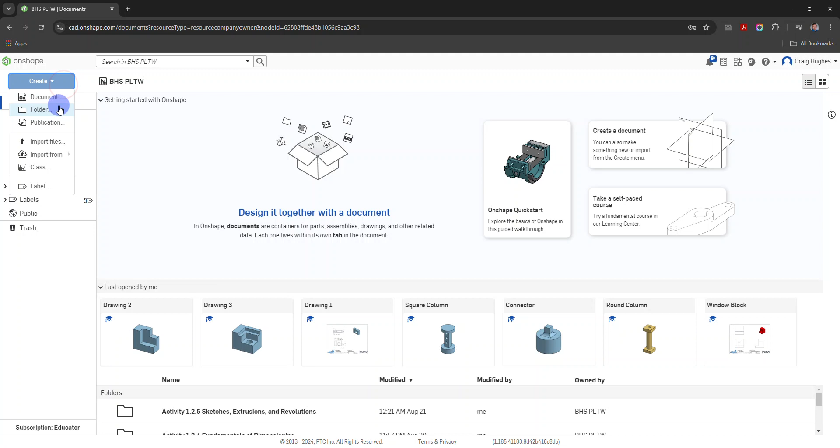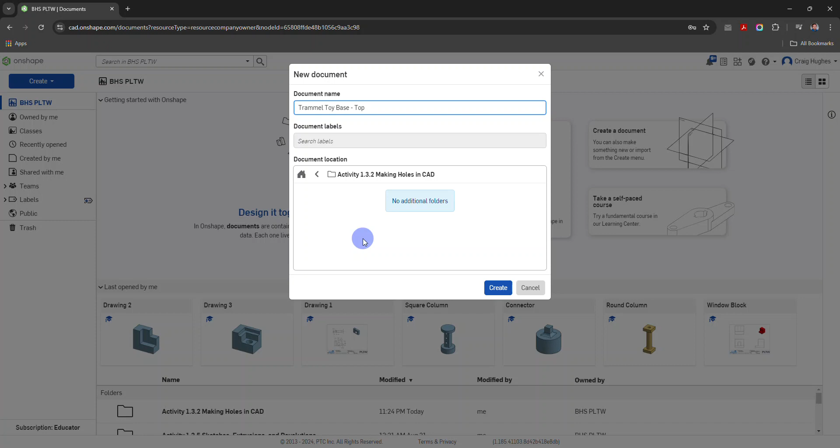To get started, we're going to go to the create button and create a new folder for the activity. With the folder created, we're going to create a new Onshape document, select open, select the folder name, select open, and then select create, giving the document name Trammel toy base, and we'll call this the top. Select create.

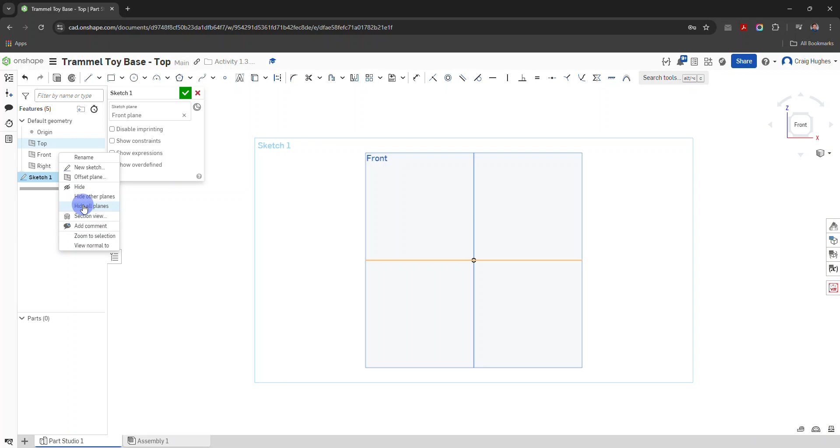We'll go ahead and get started by selecting sketch and then selecting the front work plane, and press the N key to turn us normal to that front plane. I'm going to right click on the top in the browser and select hide all planes to give us a more clutter-free sketch environment.

I'm going to go to the drop down arrow next to the corner rectangle and select center point rectangle, selecting the origin, and build out our rectangle. Our measurements are going to be 4.25 by 4.25 for the sketch.

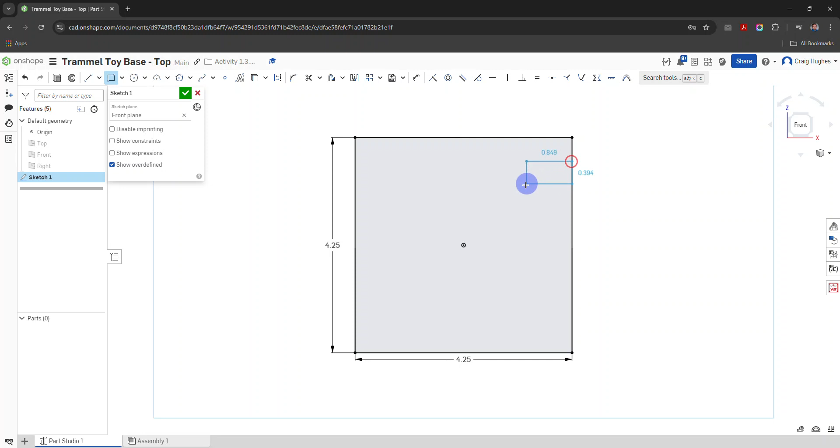While we're in here, we're going to go ahead and create those little rectangular cutouts. I'm going to change from the center rectangle to the corner rectangle. Off the right edge, I'm going to build this rectangle. It's going to be 1.75 by 0.5.

While we're here, I'm going to grab the dimension tool. Click the top edge, click this edge of the top portion of that rectangle. This is going to be a 0.5 measurement. And while we're here, we're going to clean up the sketch using the trim tool, the pair of scissors, selecting it, and then selecting the line, and once more 2 lines to create this open gap.

Now you're going to notice we're going to lose that dimension that we had placed originally. So all I've got to do is click dimension once more, click on the right edge, click on the blue line, 1.75 — it's still there. I can go ahead and hit enter, and that gives us that cutout.

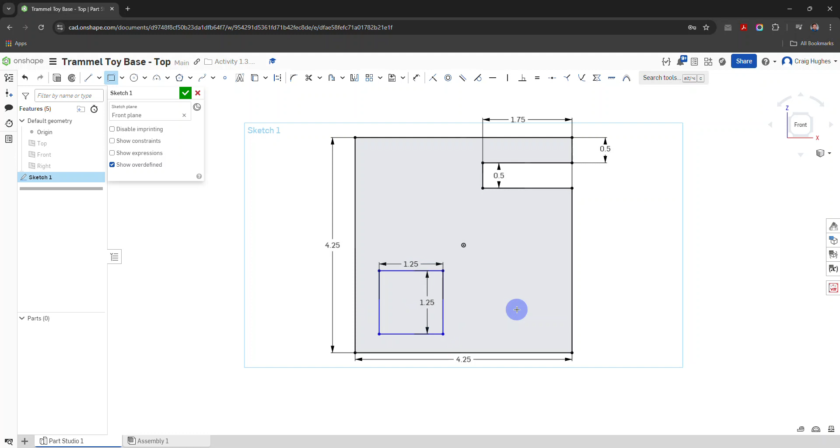Our next one, we're going to grab that 2-point corner rectangle. Down in this area, we're going to create this to be 1.25 by 1.25. Now, in order to fully define this, I'm going to select the left edge of this sketch for the rectangle. Notice I'm still drawing a rectangle, so if that happens, I can always hit escape.

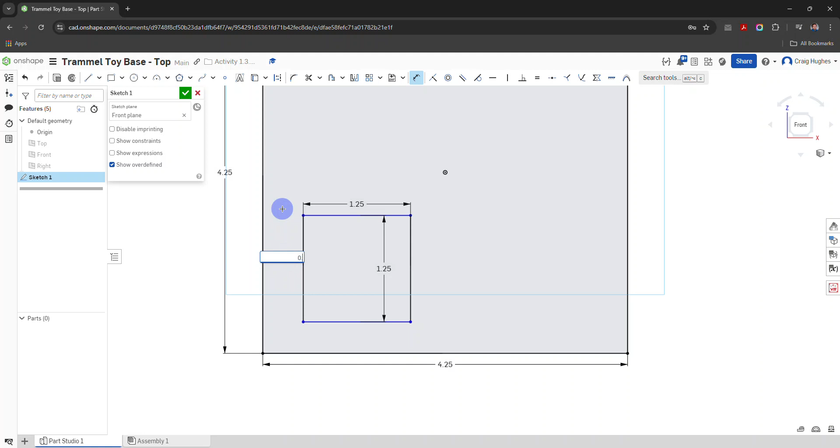Then I can go up and grab my dimension tool, or press the D key on the keyboard. I'm going to select the left edge of the outside rectangle to this one. It's going to be a 0.406. And from the bottom to the edge of this rectangle, same kind of thing, a 0.406 for that measurement.

We've got a fully constrained sketch now. We can go ahead and click the green check mark to finish it. I'm going to right click here in the graphics window and select isometric.

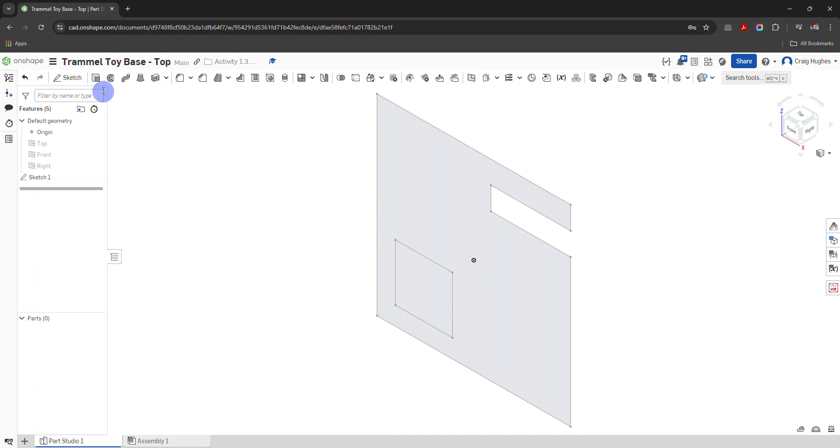We're going to select extrude, select our sketch profile. I'm going to flip the direction. This is going to have a thickness of 0.25. And we're going to select the green check mark. So there's the Trammel toy top base for the most part.

The next piece of this is going to be adding in the holes that go on this top face, or in this case the front face as we have it oriented in Onshape. I'm going to select sketch, and select the front face. I'm going to press the N key to turn it normal to that sketch plane. I'm going to grab the point command.

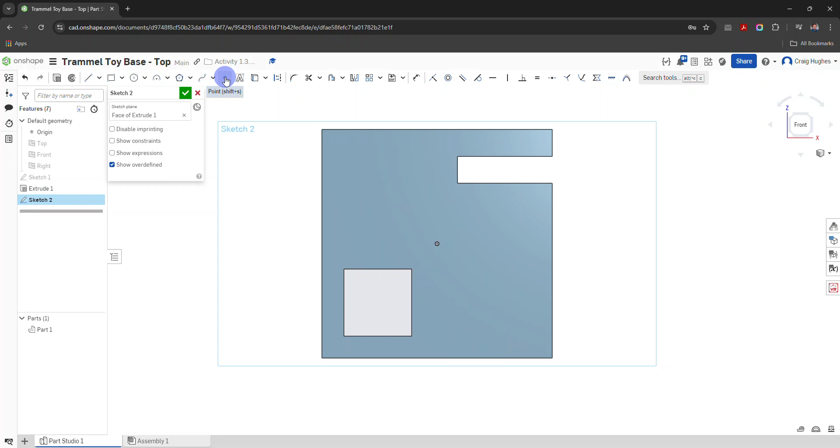So point, and we have a series of 4 points that are going to get placed in this upper left quadrant. We've got 4 points in the bottom right quadrant of our Trammel toy. And then we've got one by itself up here underneath that rectangular cutout. So we have 9 holes total.

What we're going to end up doing is use some geometric constraints. The first one I'm going to grab is the vertical constraint, and I'm going to make sure the holes that are supposed to be lined up vertically under each other, like this one and this one, get selected — I'm going to click on both of those, and click on both of these.

I'm going to click this one and this one, and this one and this one. Then I'm going to grab horizontal and click this hole, click this one, click this one, and click this one, repeating that same pattern. You're going to notice some of those points are going to move a little bit.

For some of the measurements we're going to work with, I'll go ahead and escape that horizontal constraint, and run my dimension tool from the left edge of the part to the hole, to the points, we're going to be at 0.375.

You'll notice this point and this point moved at that same distance because of those constraints. From here to here, this is going to be a value of 1.5.

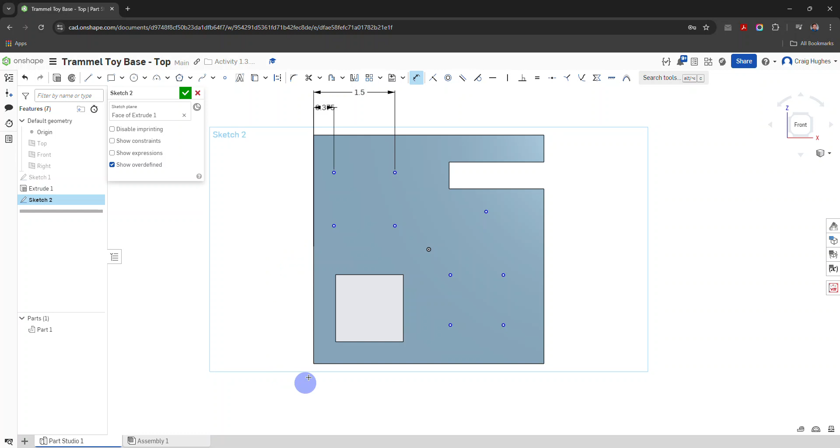As I work a little bit, I'm going to look at from the bottom up to this hole here. It's going to be 2.75. From the bottom to the top set of holes, 3.875.

Notice how these are all going to become black on the outline. These are still blue, that means these are fully constrained. So we're good on that set, and I'm going to focus on the bottom set.

From the bottom, from here to here, 0.375. From here to here, from the bottom up to that top point, 1.5.

From the left edge to this first set of holes, it's going to be 2.75. And from the left edge to the second set, ends up being 3.875. So then all we have left is this hole right here, which from the bottom of the part to this point,

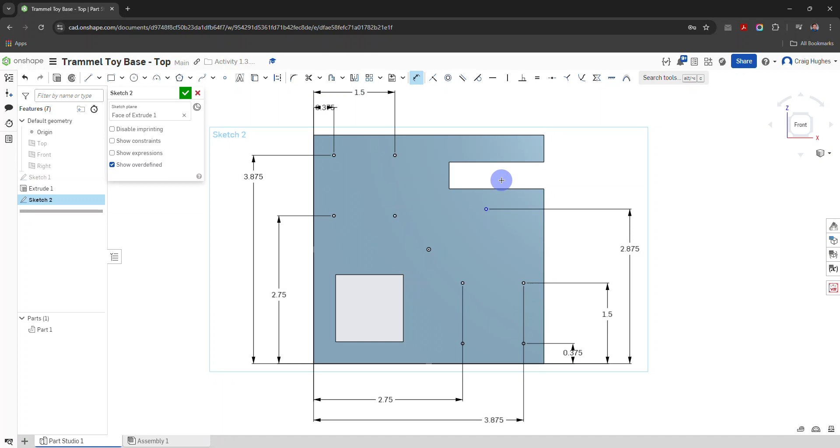it's going to have a measurement of 2.875. And then from the left edge to that point, will be 3.375.

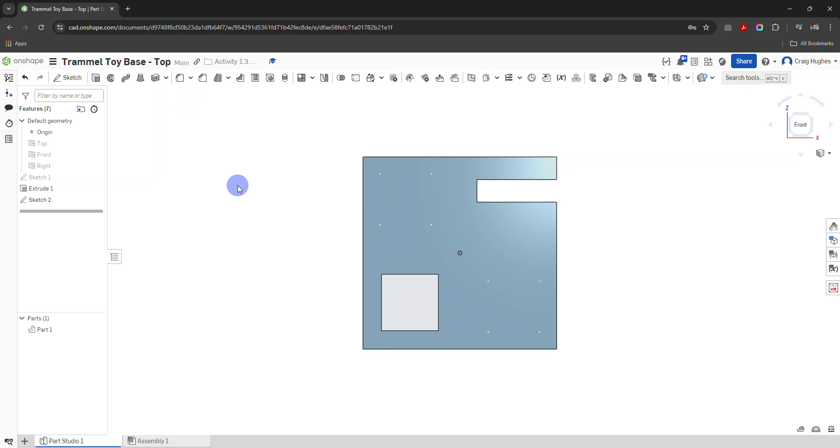So we'll notice all these points will be fully constrained. I'm going to right click to escape the dimension tool. I can select the green check mark, and I'm going to turn this to the isometric view.

What we're going to do here is run the hole command. It's going to come up and ask us for sketch points to place the holes. Now some of these have the same diameter, and so the ones that have the same diameter, we're going to go ahead and select those.

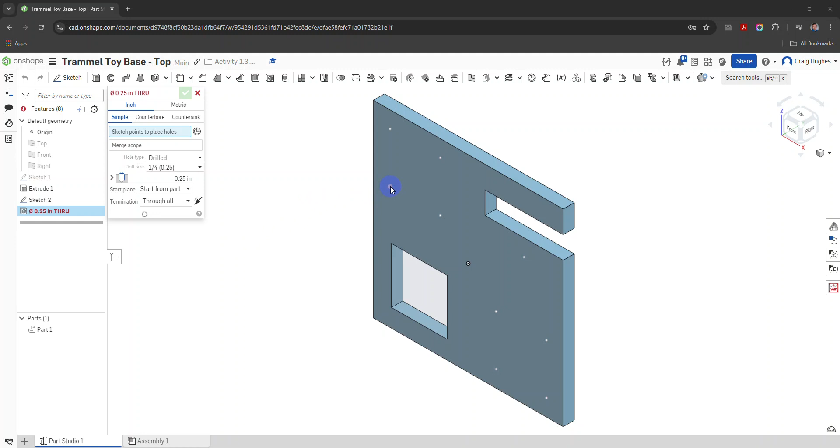For example, we have 0.177 holes. So this hole, and this one, and this one, and this one, there are 4 of those. We're going to see that we're going to be on inch. It is a simple hole, and as far as the diameter, we're going to set that to be 0.177 and select enter.

Notice that that's going to go ahead and size those holes. If I select the green check mark, I can see the holes modeled in. If I select the outside edge, I can see down here the diameter is set to 0.177. We can even see that in the features listing on the browser, 0.177 through.

Now, in order to get those other sketch points to come back up, I'm going to go over here to Sketch 2, and click on the eyeball to turn that back on. I'm going to rerun that hole command, and start selecting the remaining points. I've got 2 holes, this one and this one, that are going to have a diameter of 0.230.

I'll go ahead and select the green check mark. I'm going to have 2 holes that are going to be 0.191, so I'm going to run the hole command once more. Select this point and select this point. Diameter will be 0.191.

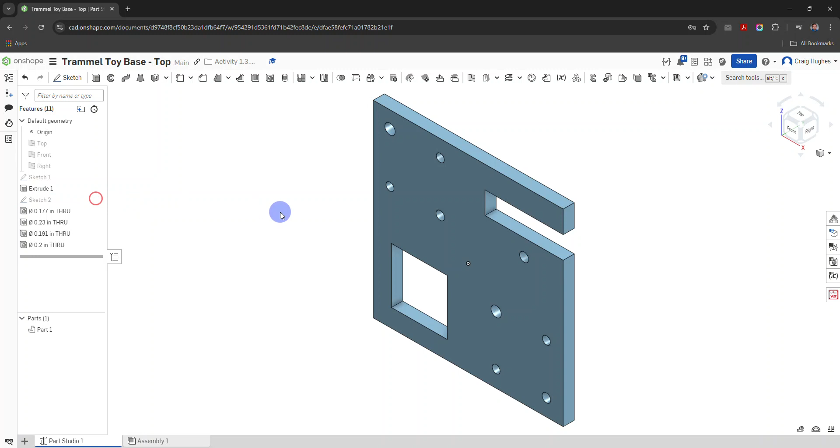Select the green check mark, and then we have the one hole by itself, which is right underneath that rectangular cutout, and it's going to just have a diameter of 0.2. Go ahead and select the green check mark. We can go ahead and turn that sketch off by clicking the eyeball, and even turn off that origin by selecting the eyeball.

And this right here is going to give us our Trammel toy base. If we're looking to have some properties, we can right click on part 1, edit, assign the material. If I search, we can put MDF, medium density fiberboard, and select the green check mark.

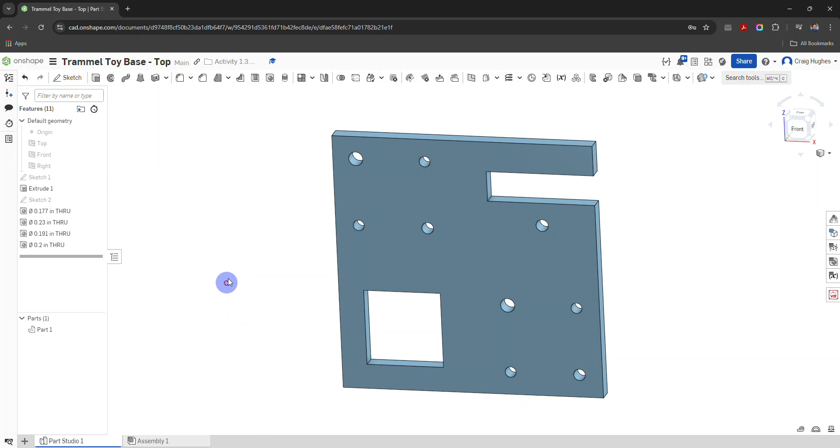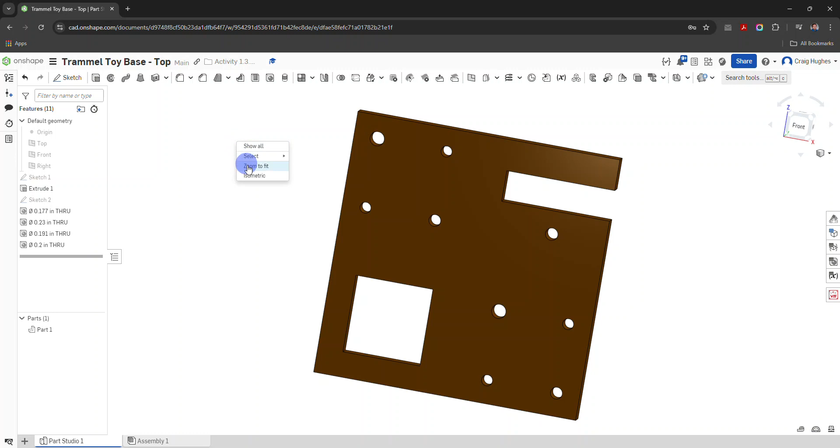And even if you wanted to edit the appearance to have kind of somewhat of a brown color or something like that, that would be fine too, so it just depends on what you're looking for, or maybe what an instructor would require. So just wanted to show you there's your Trammel toy top piece modeled, and in another video we'll look at the Trammel toy bottom component.